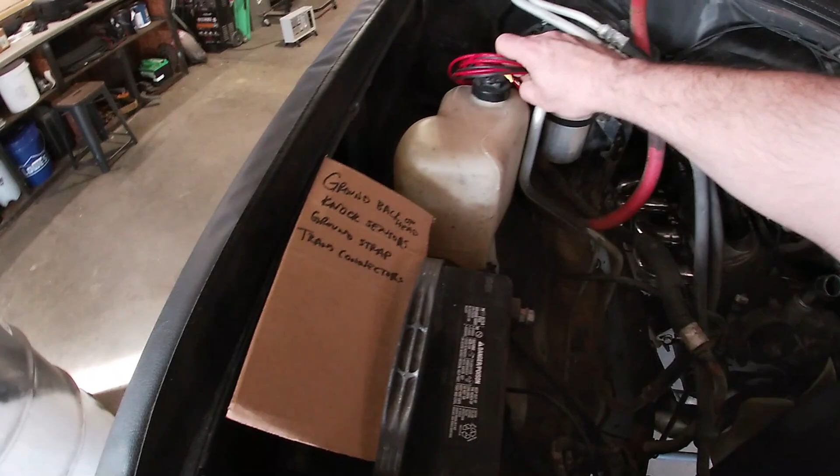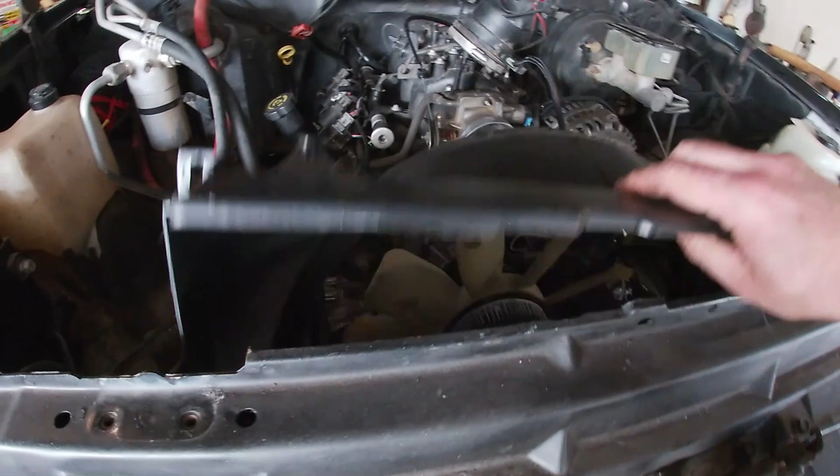So that being said, somebody put the relay kit for the power windows in, and this is the wiring they left - we're gonna fix that. Got my radiator tie downs, still have to put the radiator in, still gotta hook the throttle cable up. We got a cold air intake for it, which will help with our mass airflow sensor. We got new spark plug wires that'll work with the headers. We got O2 sensors we gotta put in and plug in.

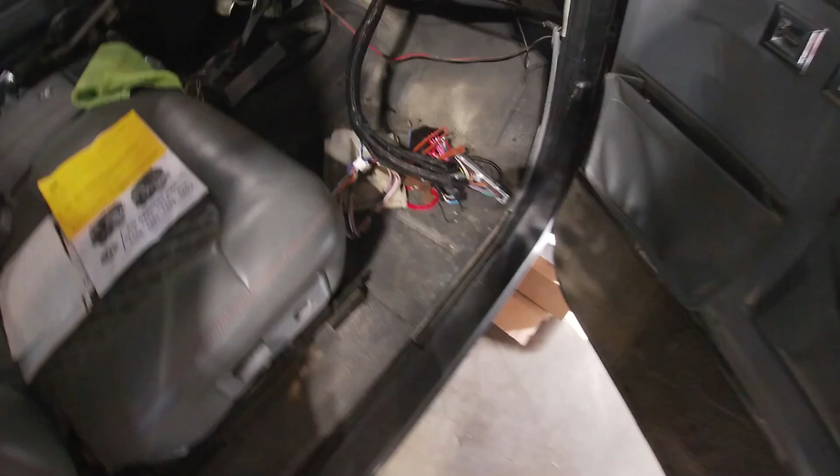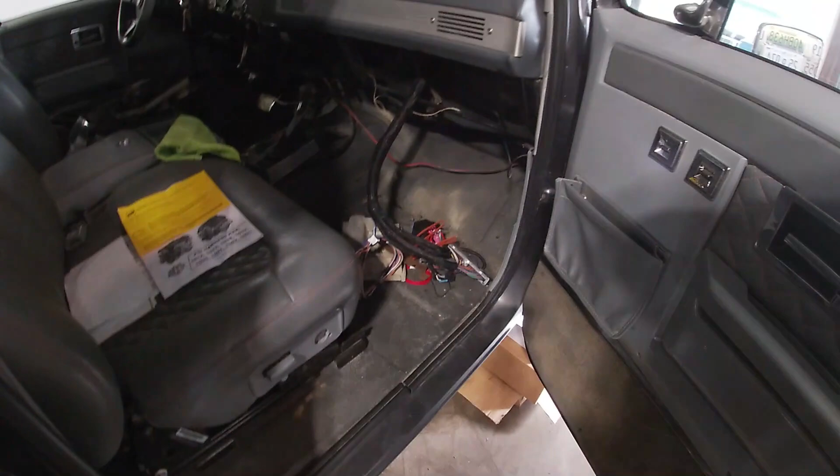Yada yada yada, got new U-joints for the drive shafts, gotta put the U-joints in the drive shafts, put the drive shafts in. I have to fabricate up some sort of mount for this computer up here, get the harness hooked up, and hook up the rest of the wires from the harness that go to the ignition switch and whatever else. Then I have to finish whatever wiring is not done on the Dakota digitals and put the dash all back together.

So let's see how it goes. I'm gonna just kind of say, yeah, this is what we're doing, and do this, and show you guys as we carry on and the progress that we make. Before the end of this video, we're hoping this thing will be ready to go. So I'm gonna get to it. Y'all hang tight, and we'll see how it goes.

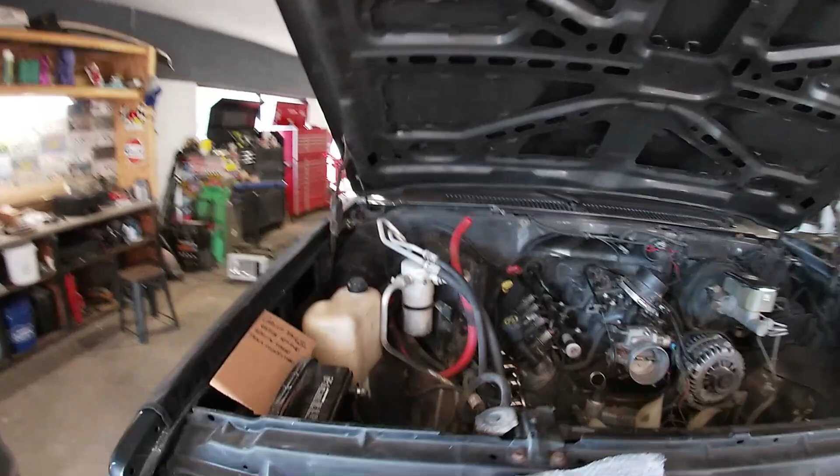So it's been rough. I don't remember exactly where I left off, but I know I was working on Marlboro Man. I remember I did an intro and talked about putting the radiator in, which we got done. So the radiator's in, and then I started messing around.

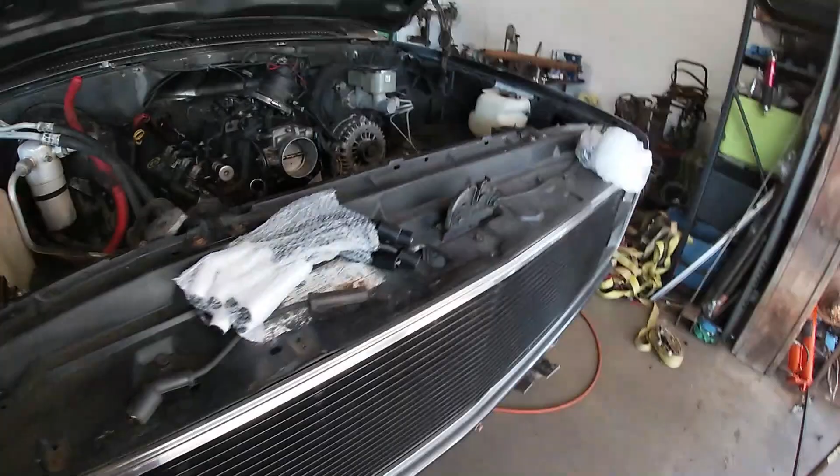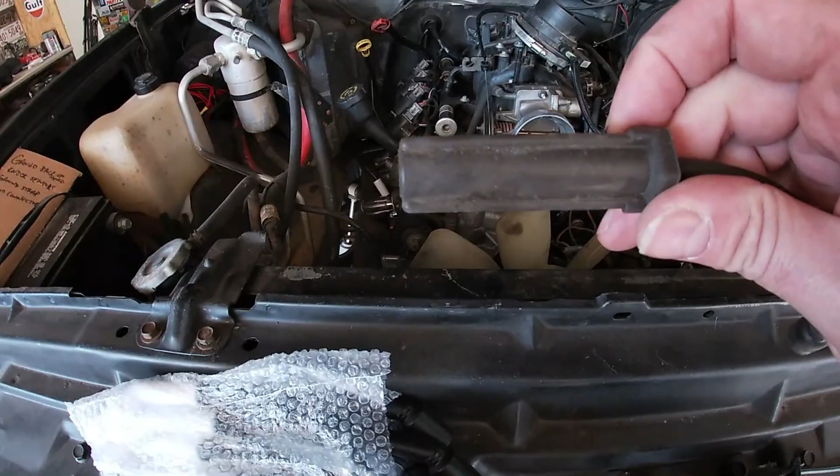We ordered wires for it, because these wires that were on here have the straight boots. And if you put them down here on the plug, they don't even really go on the plug because they sit against the header tube. That's not gonna work. You run the truck and it melts them off and it arcs out and you got messes and so on and so forth.

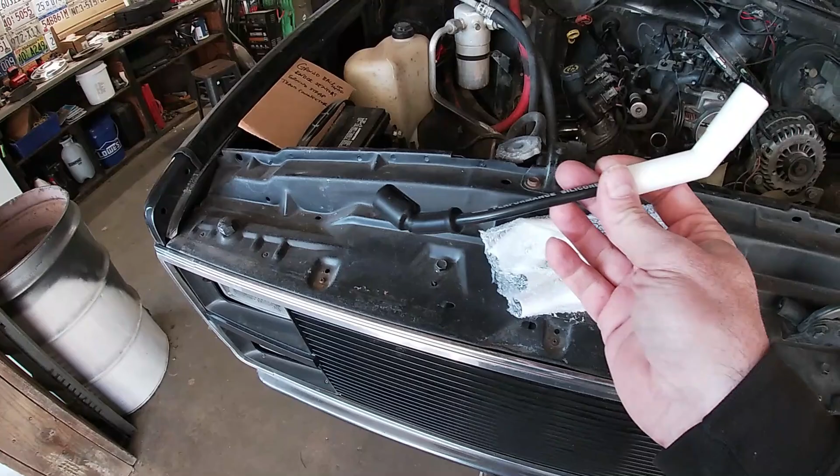So we got these LS wires, coil on top of valve cover, and they've got like a porcelain or ceramic coating on them to help with heat.

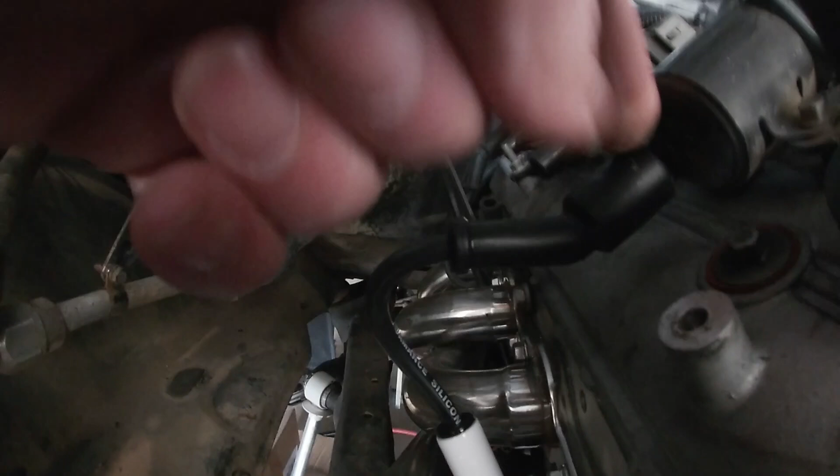And I found the best way. I put one on just to make sure it was gonna fit. That one does fit, and I found out the best way to do it is to put it on what I consider to be upside down, and then it has a nice form to get the wire down there where it needs to be. So I got one on.

I've got 7 more I gotta put on, so I'm gonna go ahead and knock that out. We'll get all the spark plugs on. I told you there's a bunch of other stuff we gotta do. We gotta change out the throttle cable. I've already got the new one halfway on, but I gotta get the old one out of the firewall, put the new one in the firewall, hook it up. We got a cold air intake to put on this thing. We gotta figure out belts and hoses.

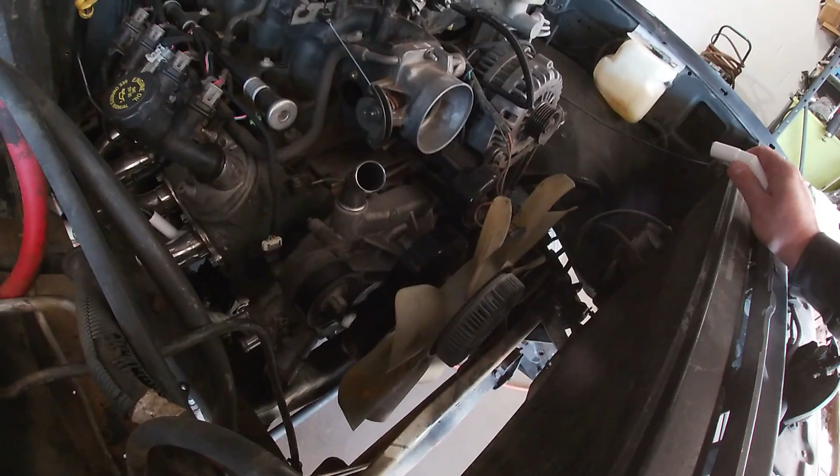There's a lot of stuff we gotta do, so this video is gonna be putting stuff together. That's the only way to finish something, is to work on it. And I'm not 100% on top of my prime right now, but this is all stuff that's not that difficult.

I still got to get underneath and put in O2 sensors. I still got to fix drive shafts. I still got to do a little tiny bit of welding on the exhaust. It's pretty much done, I just got a spot on each side that's tacked that we have to weld up, and then we can tighten up the flanges at the headers.

Other than that, fuel lines, tranny cooler lines. I'm gonna have to get part numbers and stuff and give them to the owner so that we can get what we need for that. Get those done, and then we gotta do the wiring inside. So it's gonna be fun. I'm gonna get these spark plug wires on, decide what process I'm gonna do next. I'll bring you guys back and show you what we're doing.

All right, I'll just give you guys a little update real quick. I've just kind of been taking my time. Like I said, I'm not 100%, I don't have a lot of energy, so just kind of been taking my time, putting together stuff that's not really a big ordeal, huge thing, you know, just stuff that's got to be done.

But all our spark plug wires are put on both sides. They're not touching the headers. They worked out good. I got my wire for my charge wire for my alternator cleaned up and put on. I have to find a nut for that still, which I keep forgetting about.

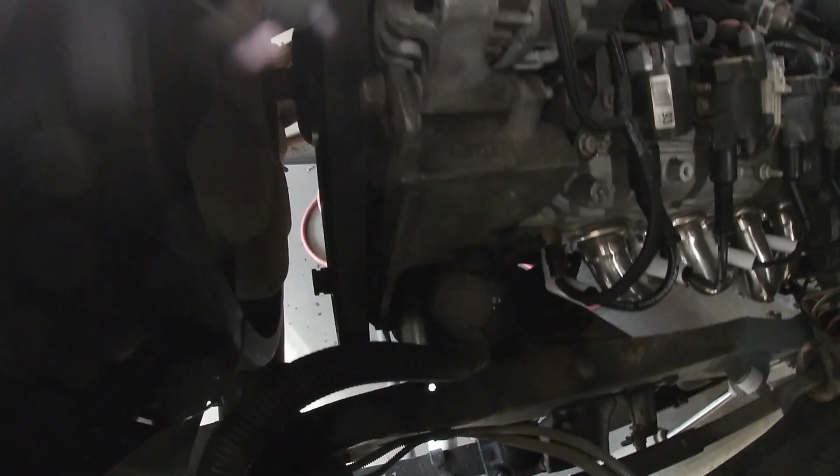I got our serpentine belt on, and I don't know if I ever talked about it in a video before, but I've talked about it with the owner of the truck. The motor sits kind of low in the chassis, at least I thought it did, but it really doesn't. And I didn't think that a stock fan shroud was gonna work. He had a stock fan shroud, but they must have screwed up when he ordered, because he ended up with 2 tops, a 2-piece fan shroud, they ended up with 2 tops and no bottoms. And so I didn't think it was gonna fit.

I didn't think it would go underneath the fan and the fan still have room to do its thing. I found a bottom - went digging through my crap scattered everywhere, and believe it or not, I found a lower shroud. Just a lower shroud though, I didn't have a top for it. Well, he had a top, I had a bottom. Things kind of worked out good. They bolted right in there.

Once again, I'm gonna get a flashlight so you guys can see this. Not that you need to, and you might be able to, but we'll get a flashlight and we'll show you.

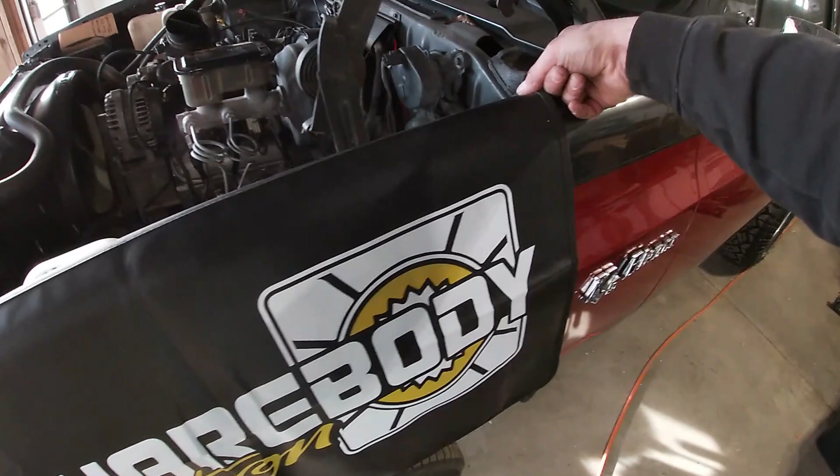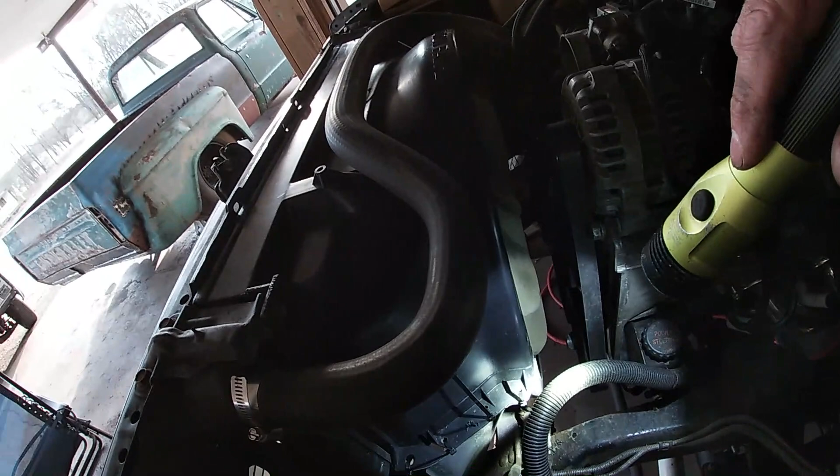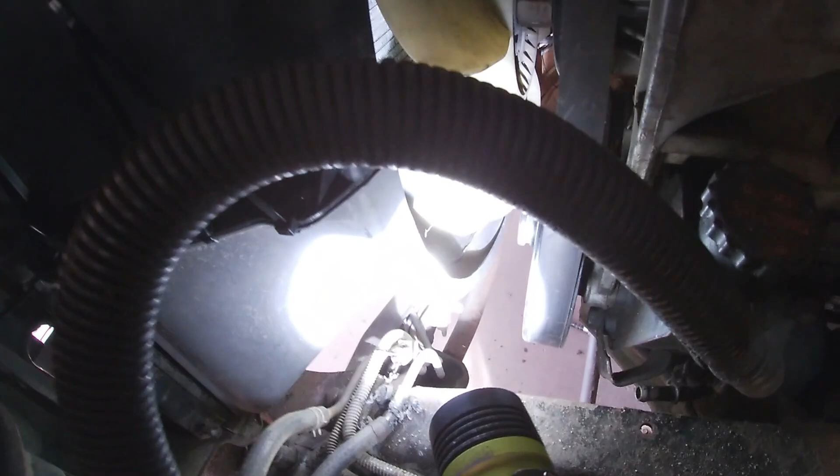But anyways, now you can see down there, I got it in. Fan spins fine, it's not hitting anything.

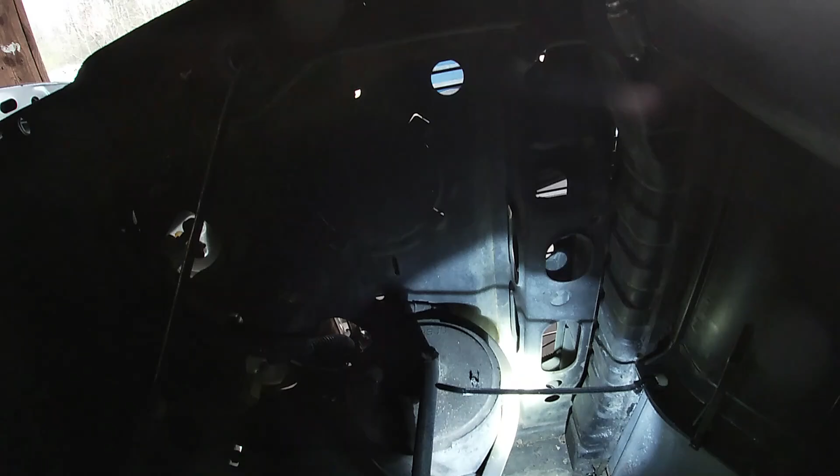I'm caught up - I wasn't really sure what I was gonna do for fan shroud. Sorry guys, my nose is itching like crazy, I don't know what the heck it is. I think I got into some fiberglass out there when I was looking for the fan shroud in the shed.

But either way, I was wondering what I was gonna do about a fan shroud. I was thinking I could use the upper piece and make sides that went down to the frame rail for the bottom or something, but I found that it went in there, it fit. Thumbs up, we're good. Got the upper radiator hose on.

I think I already showed you I got the belt on. We need a lower radiator hose. We had the upper radiator hose for the LS, which is what we need, but the lower hose that we have is from the Square Body, which isn't gonna work. So we need a lower radiator hose for like an '01 Tahoe. We'll get one of those, no big deal.

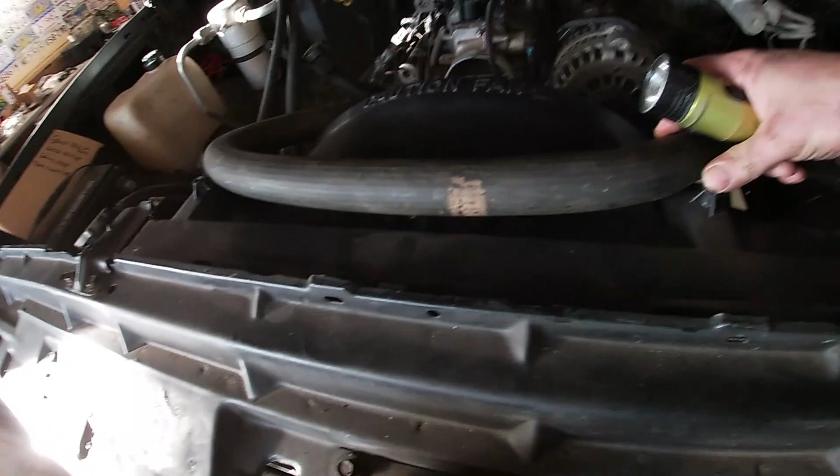But it's coming along, all this stuff is bolted in. I'd like to have some P-clamps to hold this hose in place so it's not vibrating on the plastic and whatnot. I don't have any that size, so I might make some, or I might go buy some, but I don't know. We'll get that tied down.

The engine compartment's coming together. Like I said, I need that lower hose, need to hook up battery cables. I don't remember what this is called off the top of my head - it's like the intake air temperature sensor or something. I gotta see if I have one. If I don't, we need to get one of those. Pretty sure that's where this is supposed to plug into, right there.

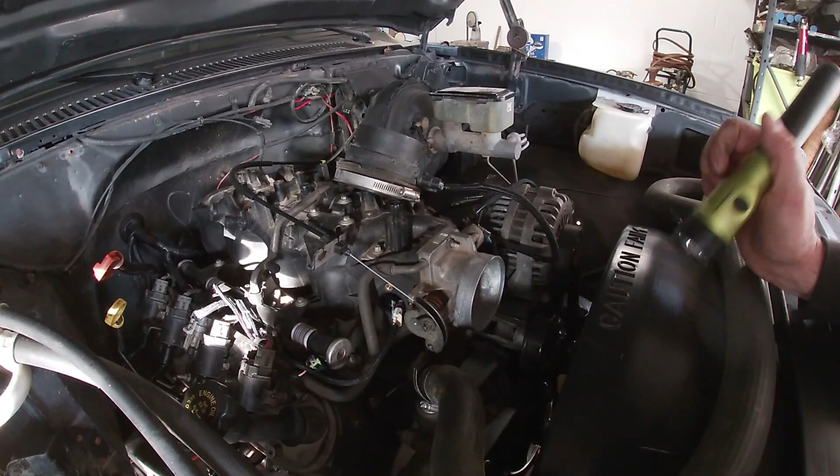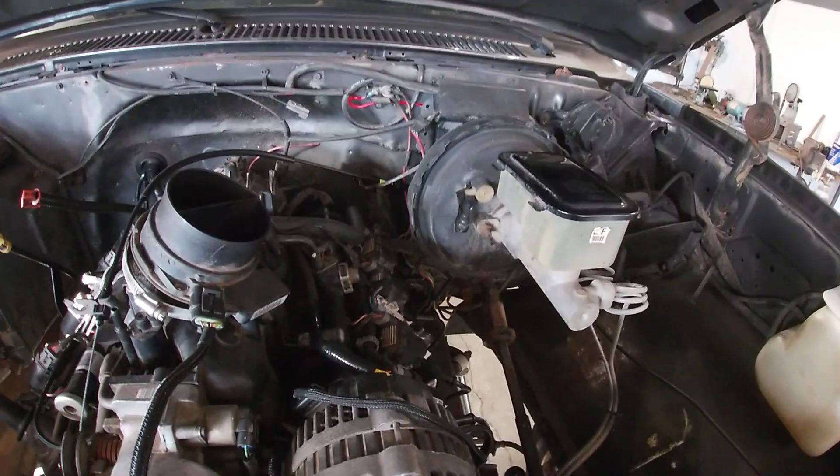And we got our cold air intake to put on and get mocked up. I just realized that I need to hook up our vacuum line for our brakes. We still got to do our throttle cable, which I'll show you guys what's going on there in a few minutes. And yeah, so I'm just trucking along, trying to get stuff done.

I was hoping to get this video up today, but it's already starting to get late and cold, and I'm not feeling good enough to do the late and cold today. I'm gonna try to get the engine compartment done today, and then we can go underneath and do the drive shafts and finish up a little bit on the exhaust and stuff tomorrow. And then I think that's probably gonna be it for this one.

And then all that'll be left is wiring and plumbing, fuel lines, and transmission cooler lines, which will be another video. So I'm gonna keep going. I'll show you guys the cool part about the throttle cables in a second.

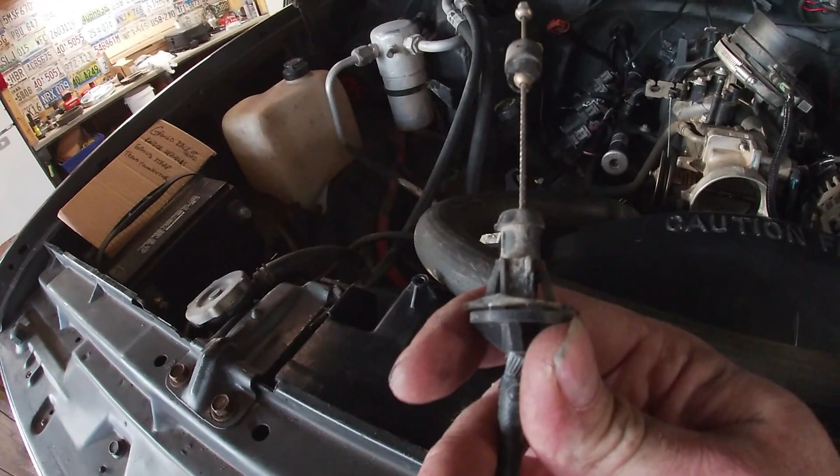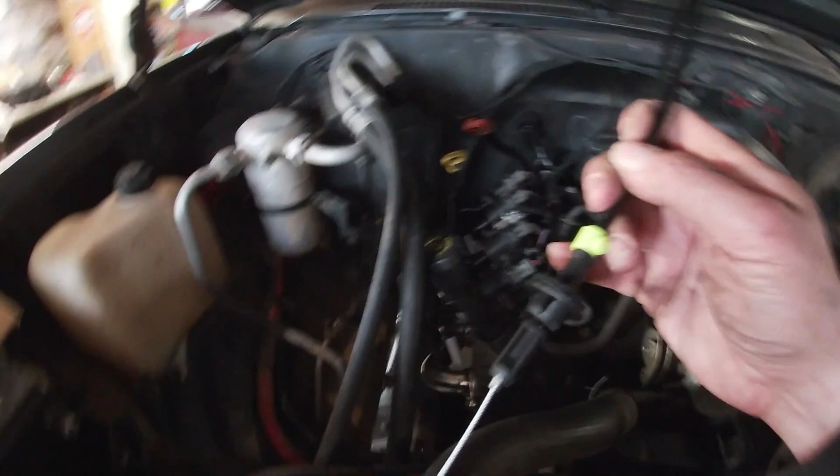I got the original throttle cable out, and this is what we have. It's square with 2 butterflies on it. The cable goes through and has a cable stop that clips onto the pedal. Now, we ordered a cable for a 2001 Tahoe. It's round - the hole that goes through the firewall is round, but it's got the same two kinds of clips on it, and it'll fit through the roundish rectangle hole that's in there.

And then we got our cable, and we got our end that clips into our throttle pedal. So it attaches to the throttle pedal the exact same way that the factory one did. So rather than getting universal aftermarket throttle cables, you buy a stock throttle cable for a 2001 Tahoe.

If you need to, sometimes you do, you can get a step bit and clean that hole up so it's a little more round, and then put that in. But generally the round part on that 2001 cable will slide right into that rectangle hole and clip in, and then you got your throttle cable that's long enough to go up to your drive-by cable. That's if you're using drive-by cable.

If you're using drive-by wire, it's a whole other ordeal, but we're not on this one, so we don't need to get into it. So I need to get that throttle cable stabbed into the firewall there, and then I can put my engine cover on or not.

But anyways, let me get a flashlight. I'll show you why I didn't really film anything today. I did a couple things up here under the hood. It's raining and way too cold for me outside. Doors closed, a little bit of a barrier. Not much light here, hard.

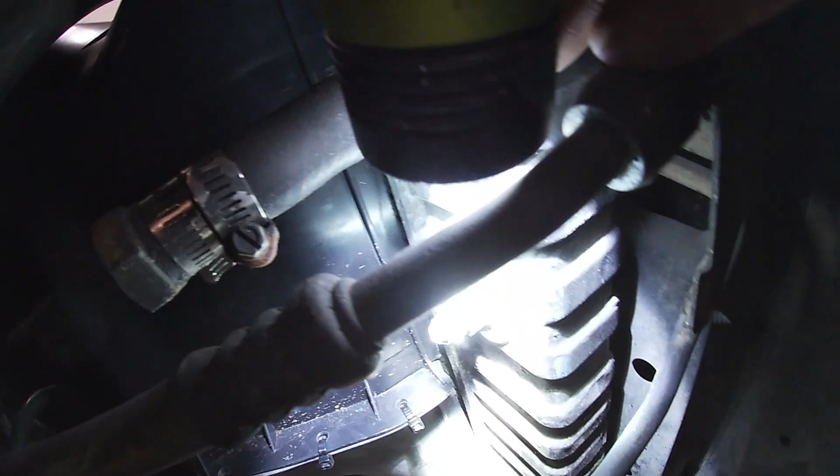So anyways, we got our fittings for our AN lines, for our tranny cooler. If I can find it, where the heck is it at? There it is. Got another one down there. We got the ones for the transmission side. I have not got them hooked up yet or put on yet. And he ordered the hose to make the lines.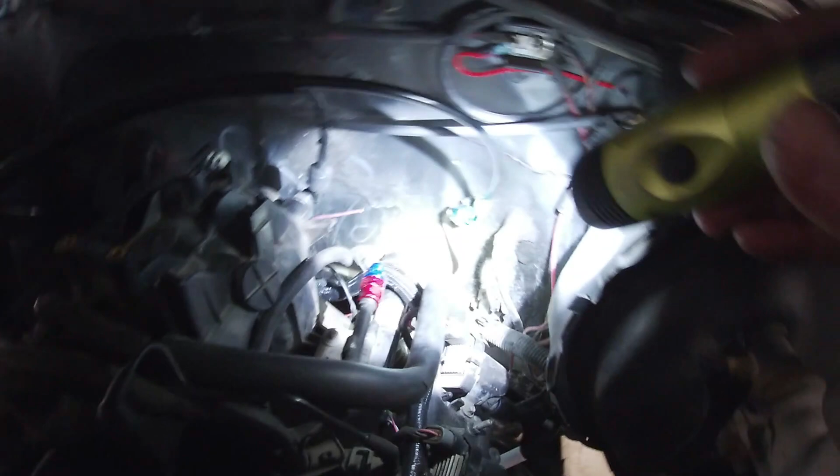So I also got our fitting for our fuel feed put on, and we got our fitting that adapts it to the original fuel line from this, because this has the metal and braided throttle body lines. I need to bend that a little bit, and then just run a line from there to there. No big deal. We need to run a return.

You guys can see down in there, maybe look down past the header. I got both the O2 sensors in, and I got the exhaust all buttoned up, so that's done.

Just a lot of little stuff, but it takes a lot of time. I've got probably five or six hours in today buttoning the exhaust up the rest of the way. I had to do some welding on it, tighten it all down, and get the O2 sensors in it. I had to modify the driver's side because I checked to make sure the O2 sensors were gonna clear before I welded everything, and in the process something moved and it wasn't clearing, so I had to modify that a little bit to make it fit.

There's just a lot going on. So I'm at the point where I need to make a list because I've got stuff that started that I haven't finished, and stuff I haven't started but need to finish. I don't want to forget anything, and I need to write everything down because we're at that point. If you've watched the channel for a long time, you know that when we make a list, we're getting close. So here we go.

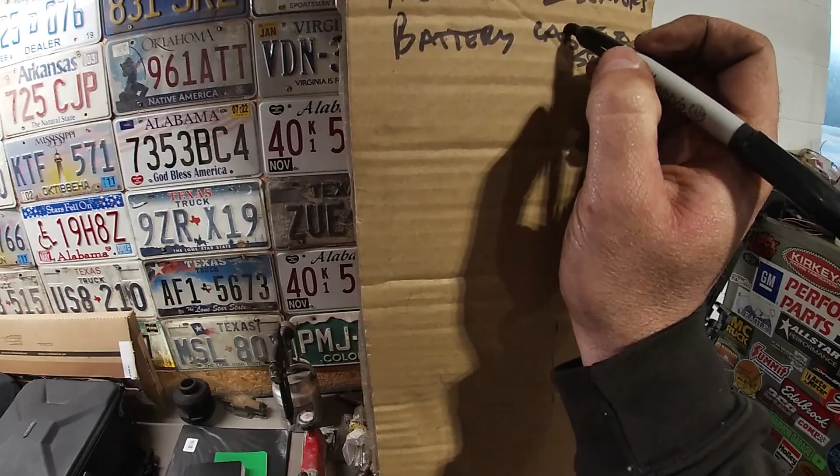Hook up O2 sensors, I got them in, got them tight. Exhaust is done, I did not plug them in and tie the wires up. Battery cable, to starter. I already got the ground on the motor, I have not run the battery, the positive.

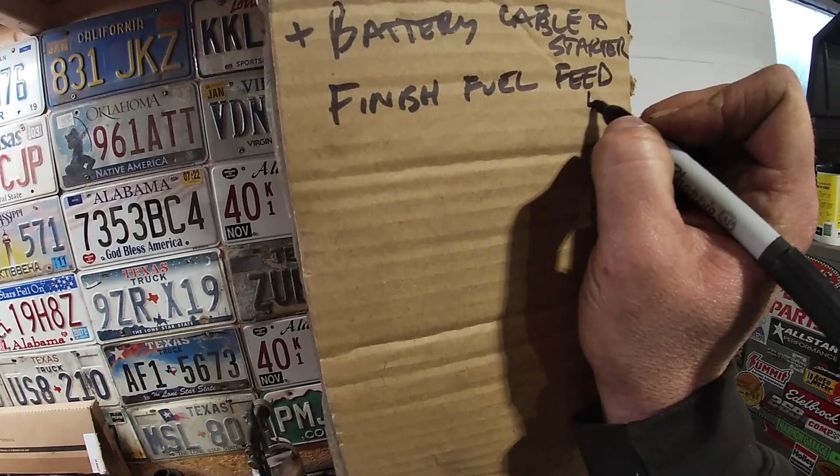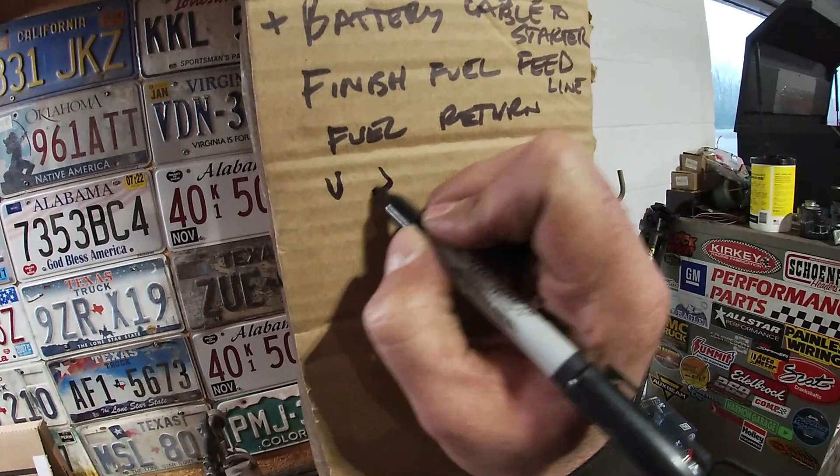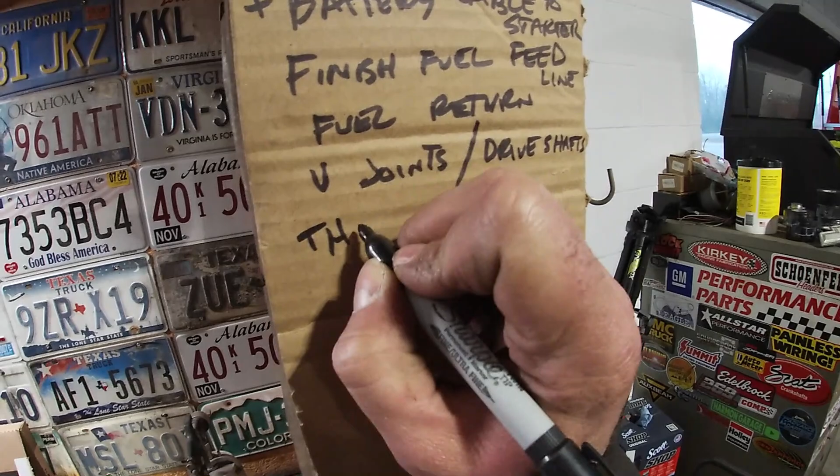Finish fuel feed line, fuel return, U-joints, drive shafts, throttle cable is most of the way done, but not finished.

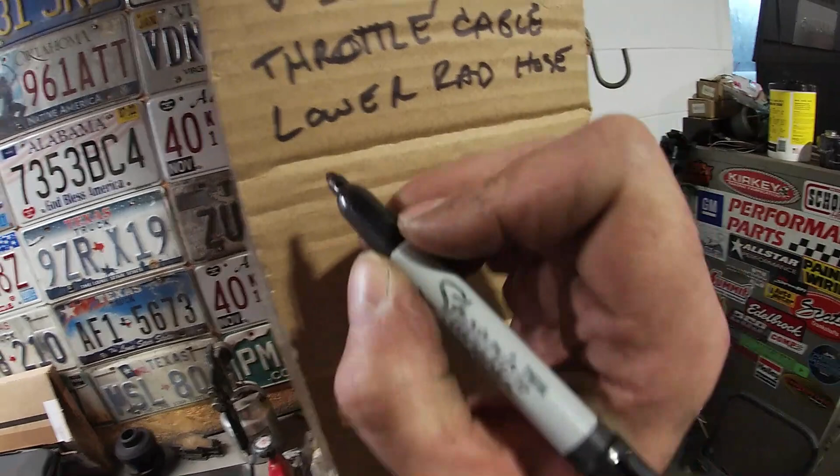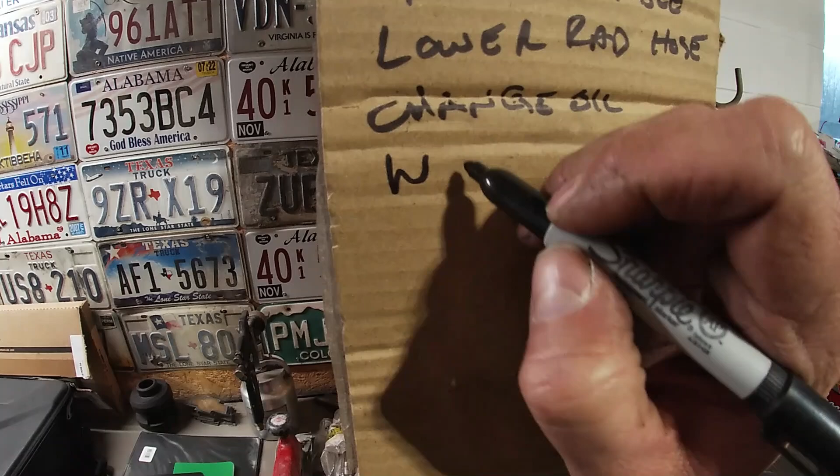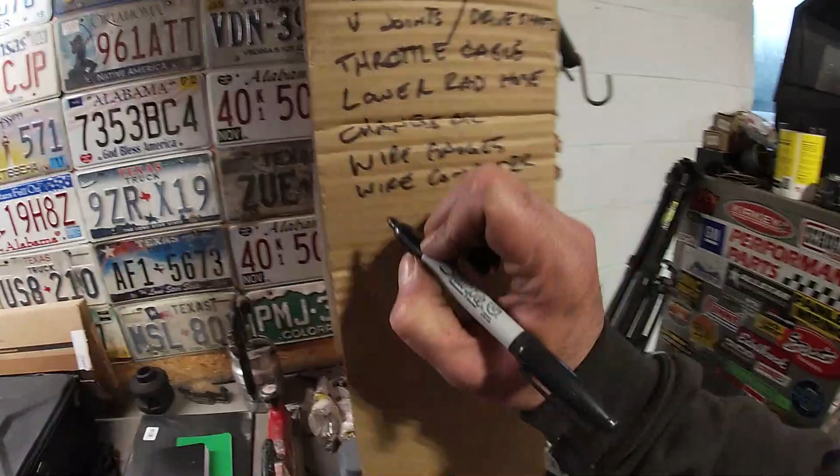What else? Lower rad hose, change oil, wire gauges, wire computer, we need to put block ground on. I just put ground, I'll figure it out. I don't know how to write or spell.

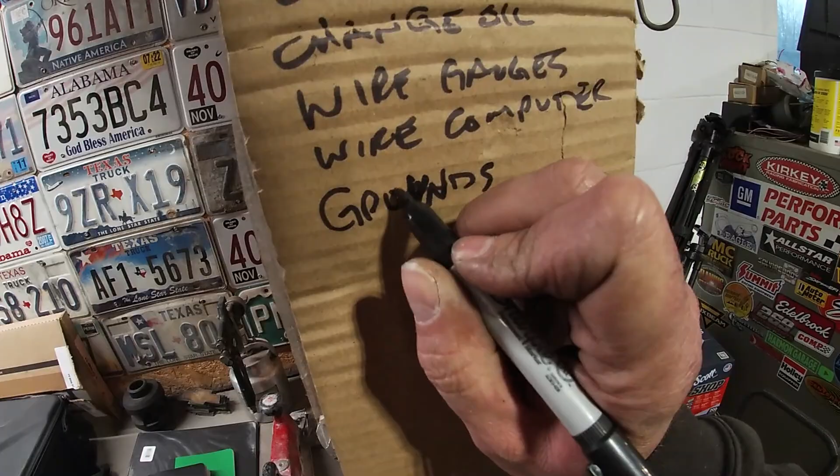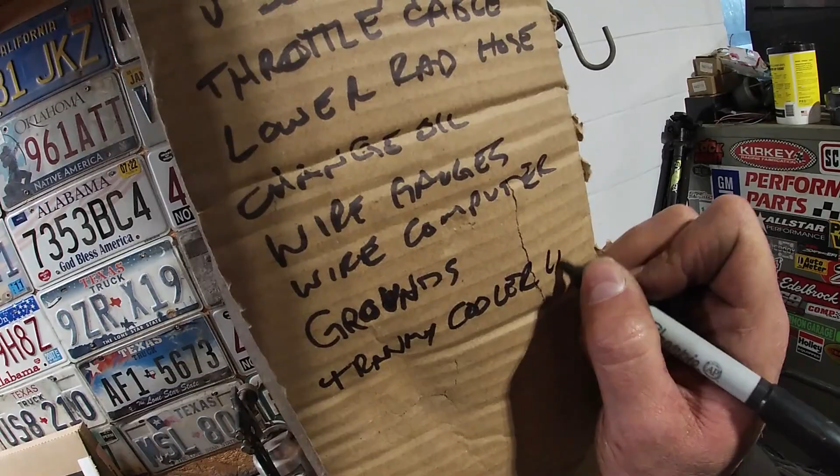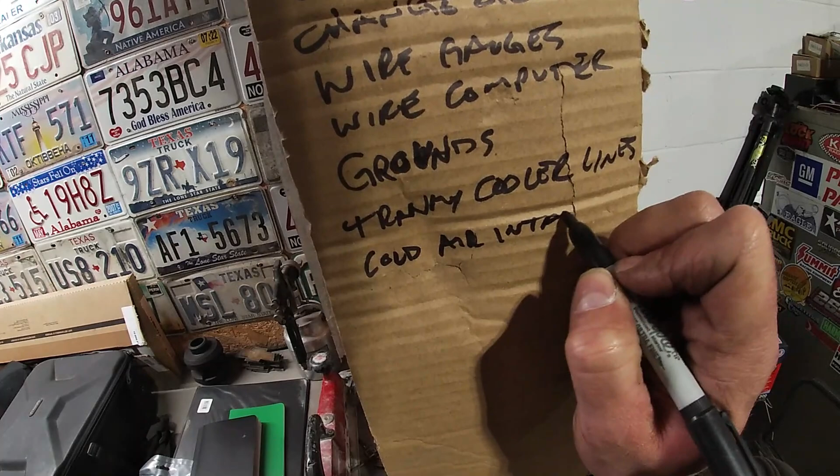Is there anything else? Wire the gauges, wire the computer, hook up the fuel lines, tranny cooler lines, cold air intake. He's supposed to be bringing me a new map sensor.

Trying to think, I think that's it. I mean, we're really getting close. Not that much left to do.

The reason I did mostly underneath stuff today and didn't film much is because I'm a wuss and it's cold, and my shop heat, yeah, that's all I got. My shop heat was aimed underneath the truck, and the air in the shop I got up to 43 degrees, and I was probably at 50, 55 underneath the truck with that heater blowing on me, which I'll say was tolerable, but that's it.

So anyways, like I said, I worked most of the day. Owner of the truck was over here for a little bit, we went over a bunch of stuff, looked at a bunch of stuff. He's happy with the way it's coming, and we're gonna keep doing what we do. He's supposed to meet me here first thing in the morning with lower radiator hoses and some more parts.

Somehow my hat got all funky, I don't know. Supposed to meet me with some more of the parts that I need. We ordered the lines to make the tranny cooler lines, so it could be a little while, a week or so before they get here. But I think other than that, we'll have everything we need to do everything that we need to do.

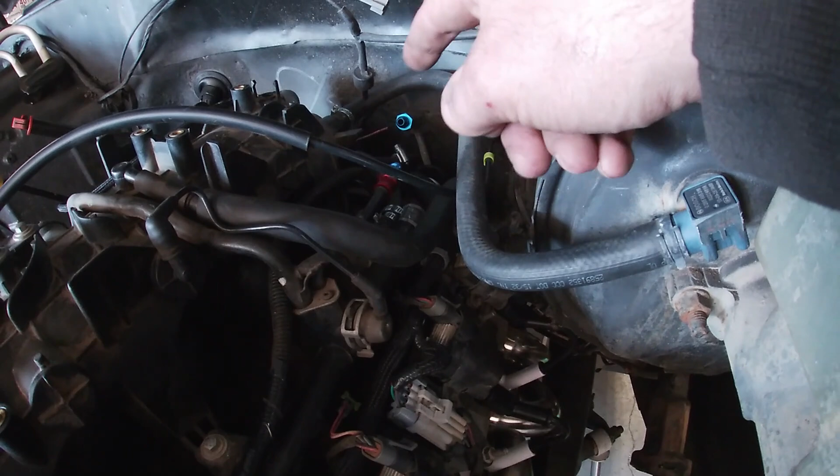I've got a braided, the original braided slash hard line coming up. I flared the end of it, and I got a flare on the rail here with the 400 PSI hose and good hose clamps running our return. So our fuel lines are plumbed, well, with the exception of that little piece of braided line that I need to make. I have the line, I have one fitting, I'm short one fitting. Owner of the truck's supposed to be bringing me one.

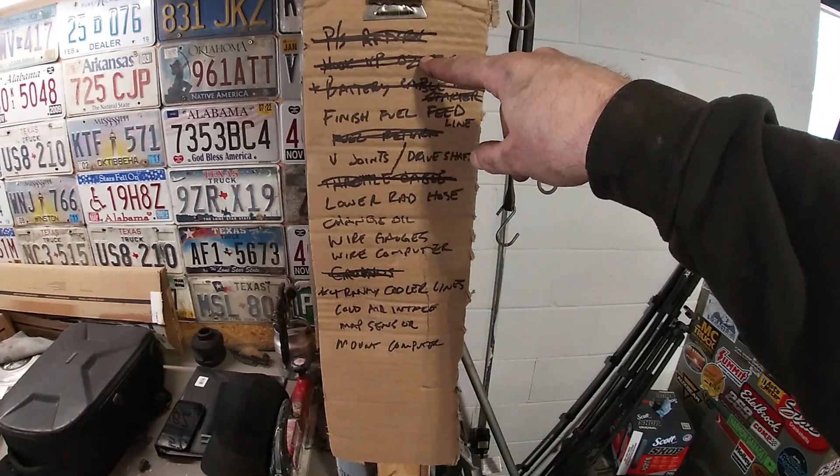So let's walk over and look at our to-do list here, see what I got done today. Power steering return line done, check. Hook up O2 sensors, route wiring, tie everything up, done, check. Battery cable to starter, tighten everything down, tie everything up, check.

Fuel return, I just told you about that, done. Throttle cable, forgot to tell you, finished that up. Throttle cable's done, and all the grounds are done. Fuel feed line, I need another fitting for it. Lower radiator hose hasn't made it here yet, don't have oil and filter.

We're gonna save all the wiring to do it one time. Tranny cooler lines, I put the fittings in the side of the transmission, and let me tell you, that was a fun job. But anyways, they're in there. I need fittings and line, which are ordered, to finish those. We got cold air intake, map sensor that we're waiting for, and I've got to mount the computer, which I'll do when I wire it.

So basically, waiting on parts, not gonna do right now, waiting on parts, not gonna do right now. So the only thing I got left on my list that I can actually do is U-joints in the drive shaft. U-joints here, and cold air intake right there in that box. So that's what we're gonna do to finish out today, and that's what we're gonna do to finish out this video.

So I'm gonna yank the drive shafts that are just laying on the floor underneath the truck. I'm gonna yank them out. We'll stab some U-joints in them, and then we'll install them, and then we'll do a cold air intake.

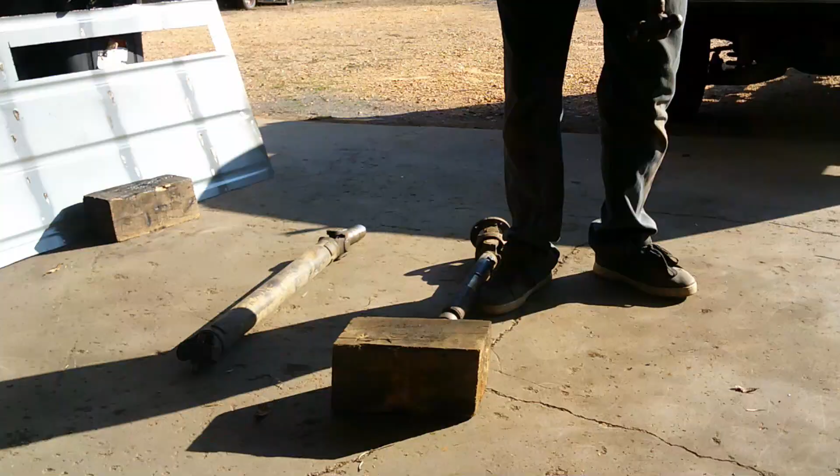Alright, well, I checked the U-joints before I got started, and the one that we need for the front is correct. The one that we need for the back is not. So I'll go ahead and change out the front one, give us something to do, and then we'll have to take the one for the back to the store and exchange it, and we'll catch up with it later.

So this one's got external snap rings. Sometimes they come out easy, sometimes they don't, but I just take a needle nose, pinch them together, try to get them to move, and pop them out. Do the same thing on the other side. The biggest part is they get all dirty and crusty in the grooves that they sit in, trying to get the whole thing out of the groove.

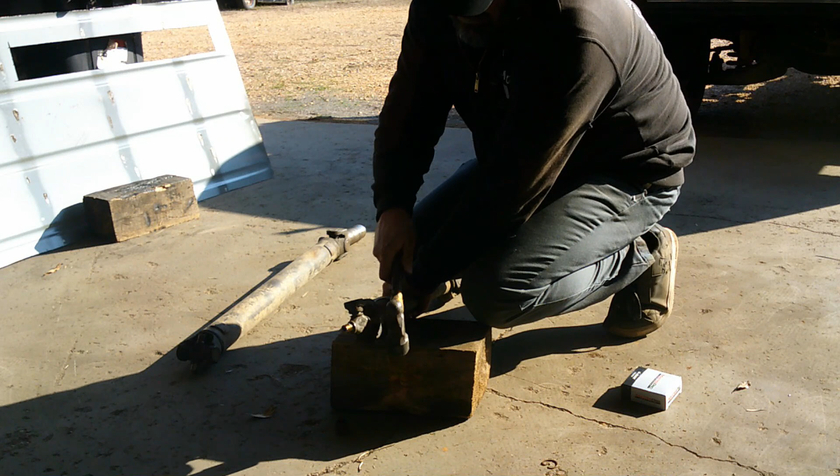Like so. Alright, got that done. Now you want to be really, really gentle, and yeah, knock this out. By really gentle, I mean hit it until it comes out. As far as that wants to go that way. There are better ways to do that, or other ways to do that, but that way's always worked for me.

Got our new U-joint here. It's fancy too, heavy duty, anodized black caps. Might be too good for me. Be careful, take these off. Check and make sure all our needles are good. And now we'll screw up, have needles bent over in there and everything else six or seven times, and then we'll get mad, and then we'll finally get it in. Because that's just usually how it goes.

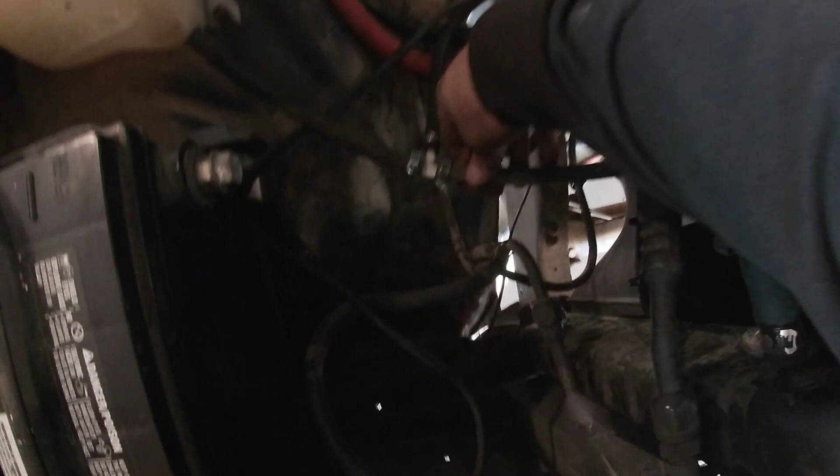Well, we don't have an LS surge tank, we have the factory overflow bottle from the K5. So what I did is, we got our hose here coming out of the radiator, going down here. I cut it, put a T in it, ran this hose up over to here, we're gonna be able to tie it off down here with our heater hoses, and that's gonna put it, and it can loop into the radiator or back into the surge tank, whichever way it needs to go. But that allows that to be hooked up and keep coolant flowing the way it's supposed to. I have seen people just unhook those, cap them so it doesn't run through there, but it's there. We have a way to hook it up, so why not?

And it's driving me nuts because I know what that coolant system's called, and I can't remember for the life of me. Steam ports - dang it, the dang steam ports. It hooks up to the steam ports, goes through the throttle body. You get the picture, nobody probably cares. Anyways, steam vents, steam ports, whatever you want to call it.

We got the drive shaft in. I got a bunch of work done underneath, so I figure I'll run this thing up on the lift real quick so I can take you guys underneath it and show you what I got done.

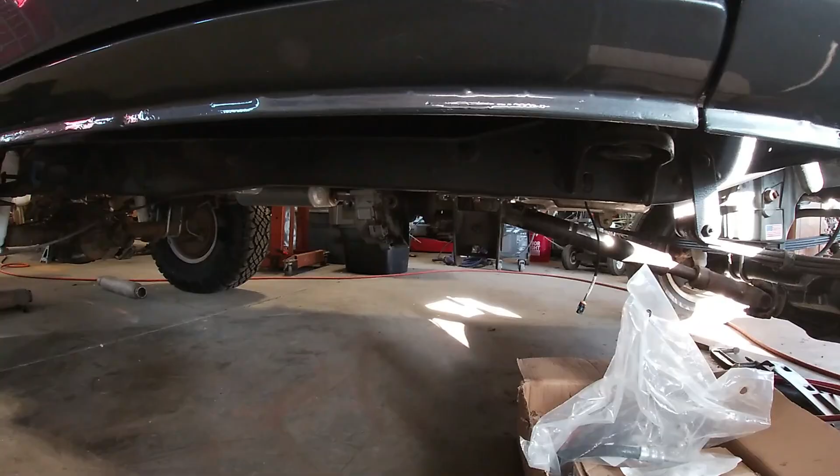Yeah, I'm just messing around - we ain't got no lifts here. Anyways, you can see from here, drive shaft is in. Everything is good, it's all tight.

Next thing we're gonna do, we have a somewhat universal, somewhat for an LS motor, cold air intake. Comes with our boots, comes with our filter, comes with our tube. We got some brackets on there to tie it off. We're not gonna be able to use the box that comes with it because that box goes on a Tahoe and it would go where the battery is on this, and we can't take the battery out for the air cleaner, so we're gonna have to modify a little bit to make things fit where we need them to fit.

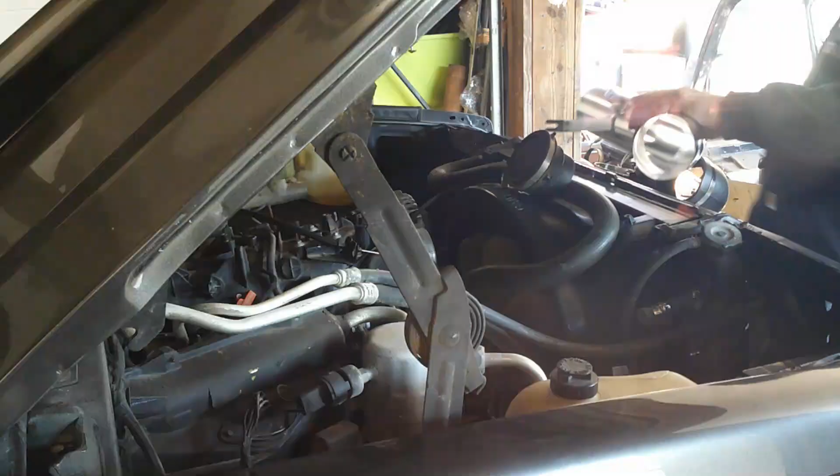But I'm gonna set the camera up over here. We're gonna get this stuff up here and we're gonna get a cold air intake put in. Super difficult installation? Not really. We got our silicone boot here, and it's got a 90 - the short side is gonna go on here, on the throttle body.

I'm going to snug it, but I'm not going to tighten it down because we don't know exactly where it needs to go until we get the tube on. So we'll just get that snug down. And we got our tube here.

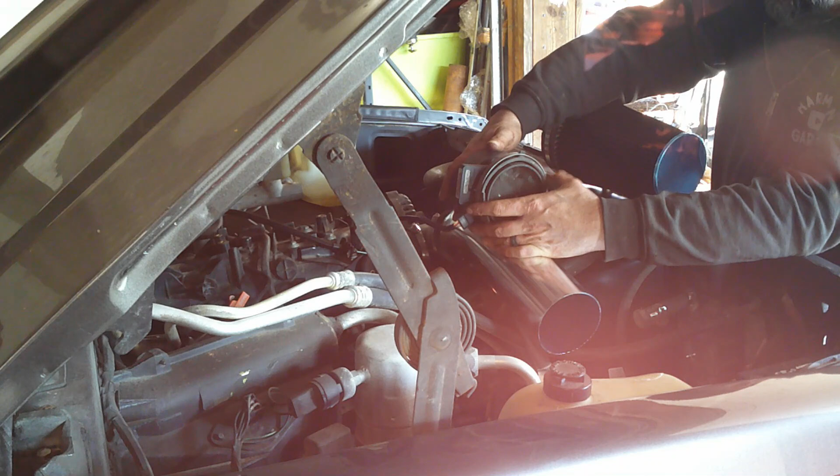Let's see what we can do here, because we can probably just cut this tube short, and do something along those lines right there. And we'll just have a short intake, and then we won't have to worry about our filter being so long, because it'll be okay.

And that ought to do it. I think maybe, because that's so low, I'll run that wire underneath the intake. We're either going to get more or less. We'll try that.

On here. That should work, it's gonna be looser once I cut it off. So let me get a marker.

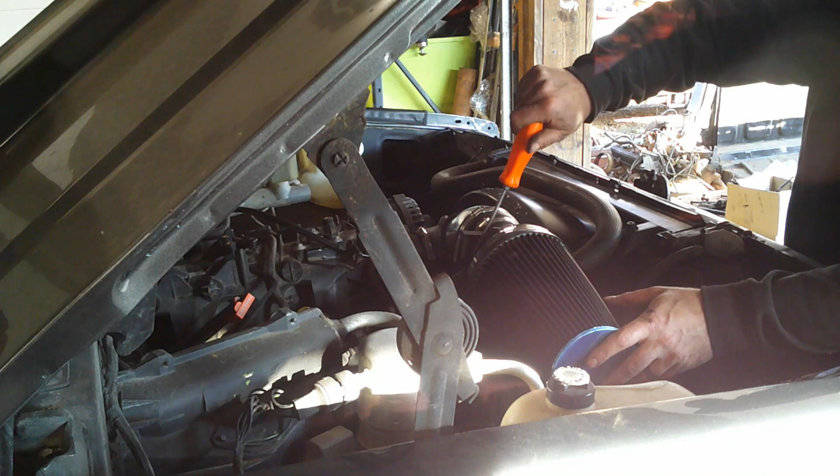Alright, here I am being an extremely awesome YouTuber again. I went over and cut the tube, came back, started tossing it together, and never turned you guys back on. So I shortened it up. We just got a nice little 90, big 4-inch tube stuffed right down the throat of this little 5.3.

We got plenty of slack here. You guys probably can't see that well, but there's plenty of slack on our wire so it's not pulled tight. Nice and rigid. I'll make a little support sooner or later before the truck leaves, just so it doesn't - I mean, it's not going anywhere. It's not touching the radiator hose right now, but I just want to make sure it doesn't.

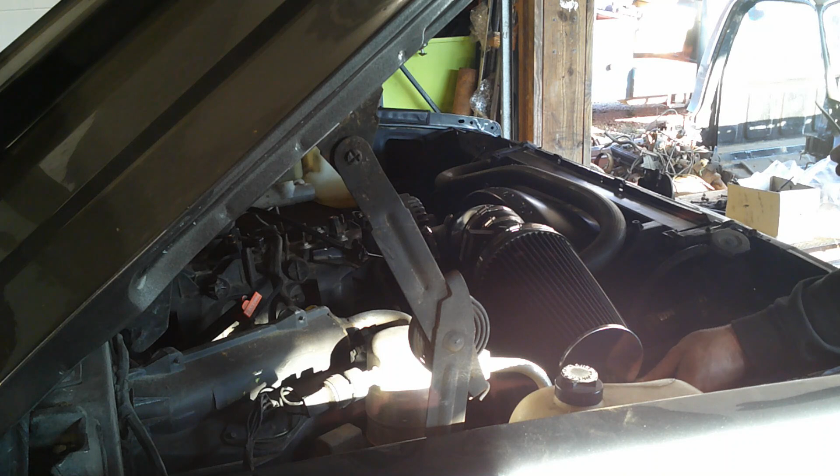So later on, before the truck leaves, I'll make some sort of little support for it, but other than that it's nice and high up out of the way, and nice and short, good for performance, and yeah, it's not in the way of anything. He's got a Dirty Dingo high mount AC setup that he's gonna put on later, we're not doing that right now. Got plenty of room to get to our oil fill, got plenty of room for our overflow, got plenty of room for our battery and everything.

Alright, so it works out, everything works out good. So I'm going to set you guys up. The only thing I'm worried about is it being high and hitting the hood. So we're going to put you guys in position here on the side. And then I'm going to slowly put the hood down and need you guys to let me know if it's hitting it.

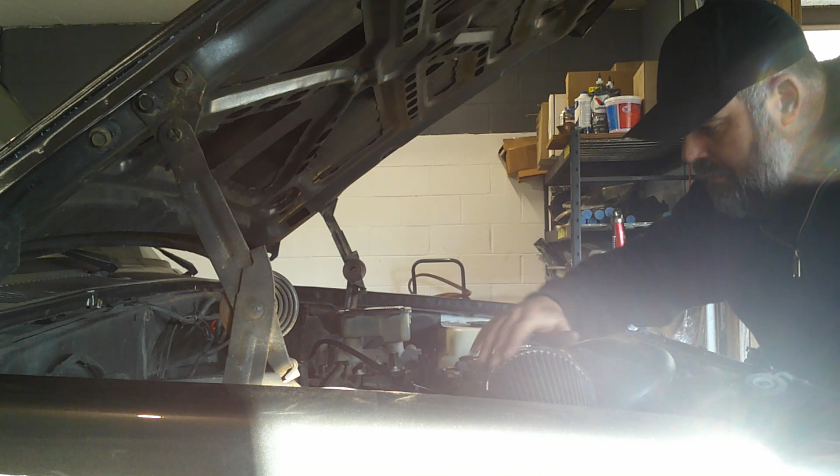I don't see any marks on anything. This doesn't appear to have moved, still in the exact same spot. I don't think we're hitting the hood. I think it's good. I'm gonna bring you guys back and show you what it looks like from up top.

All right, before anything else, we're gonna come over here to our list and mark off what we got done, because that's more important than anything else. The smaller this list gets, the closer we are to finishing this thing, and that's what our goal is. So cold air intake - bang, done.

U-joints, drive shafts, we're only already halfway done, so we're not going to mark that off yet. But our list is a lot closer than it was when we got here this morning, and we're waiting on parts. So that's about as far as we can go with what we have right now.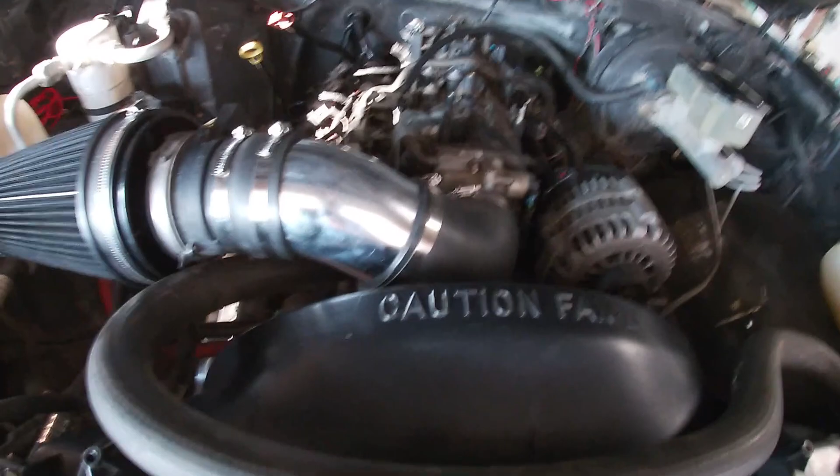Sorry guys, I'm cleaning up this plastic bag, the wind's blowing it around. So we can't do much more, but here's how our intake turned out. Got a nice 90, it's real rigid. Like I said, I'll put a little brace - I don't know, it kind of depends. For now I could put a brace off of the head, and later on when we do the AC mount I might have to move it, but we'll figure that out later. It's pretty stout, I mean it's not like it's gonna hurt anything, it's just sitting there. So cold air intake's done.

A lot of other stuff got done in this video. Like I said guys, this video's not probably up to par with what I normally do, or depending on what you think of my videos, you might like this better. But I haven't been feeling the greatest. I'm feeling better now, we're doing good. I worked through it, I got a bunch of stuff done on this, which I'm excited about because once again, we got to get it done.